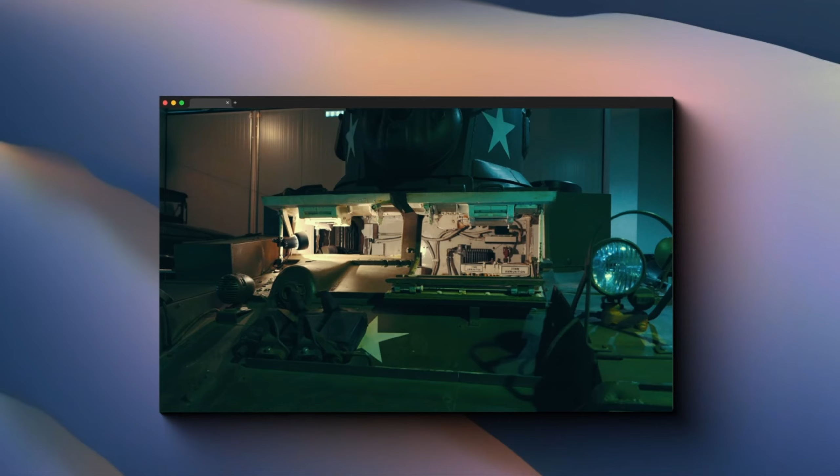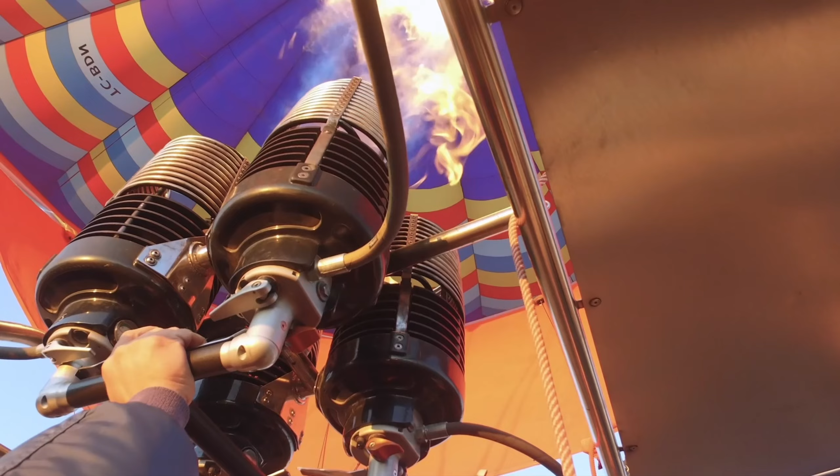Let's start by clearing up a massive misconception. When I say gas engine, I'm talking about the reciprocating piston engines you find in cars, not the fuel itself. Because here's where it gets interesting, modern jet engines actually do burn a type of gasoline. It's called jet fuel or kerosene, which is basically gasoline's more refined cousin. But the way these engines burn that fuel? That's where the magic happens. It's the difference between pushing yourself on a skateboard versus strapping a rocket to your back. Both might get you moving, but one is clearly better suited for certain situations.

Think about this for a second. A typical car engine has hundreds of moving parts: pistons pumping up and down, valves opening and closing, a crankshaft spinning around. It's like a mechanical orchestra where every instrument needs perfect timing. Now imagine trying to conduct that orchestra while flying through a thunderstorm at 500 miles per hour. Starting to see the problem?

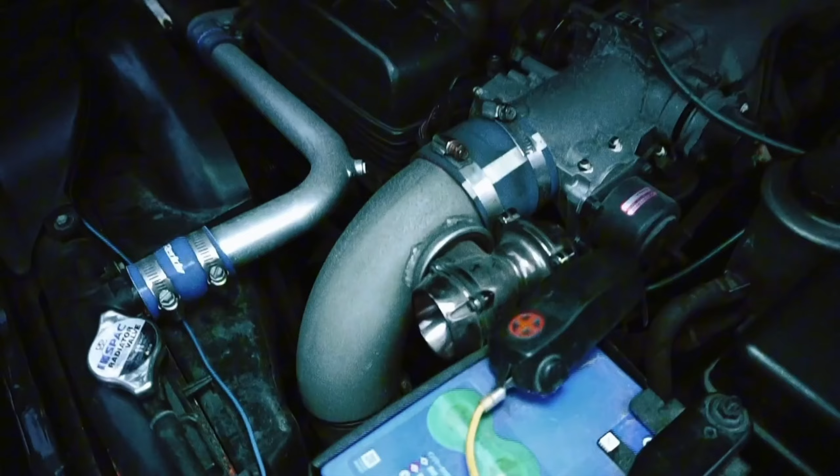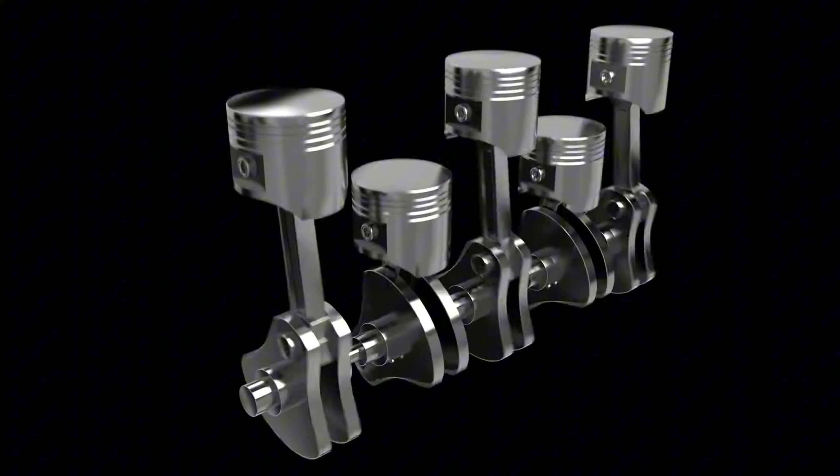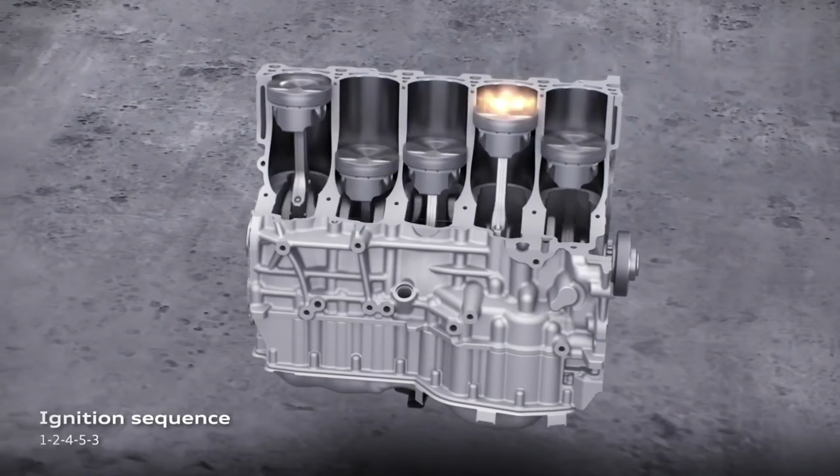Here's where we need to talk about something called the altitude problem. Lighting a match at sea level is much easier than lighting a match at the top of Mount Everest. Why? Because the air up there is about a third as dense as it is down here. Your car engine faces the exact same problem. Piston engines are like that friend who can only function with their morning coffee, except their coffee is oxygen. They need a very specific mixture of fuel and air to work properly. At sea level, no problem. But climb to 30,000 feet, and that engine is basically suffocating.

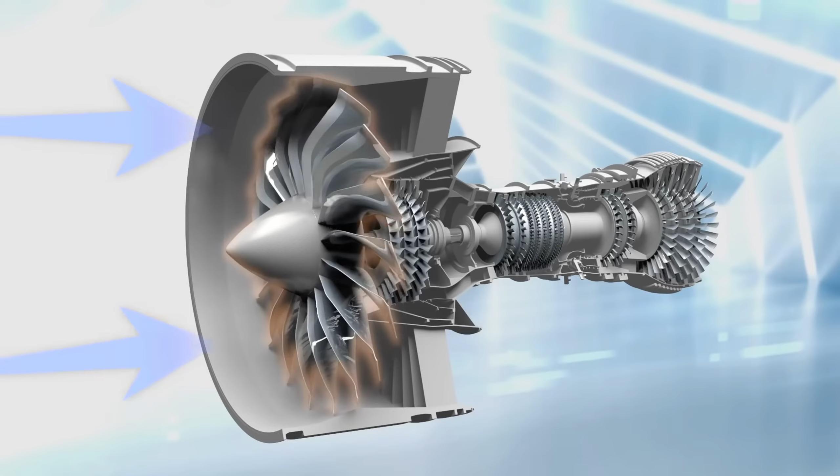Commercial airliners cruise at altitudes where the air pressure is so low that water boils at room temperature. Your car engine would wheeze, sputter, and die long before reaching those heights. Meanwhile, jet engines actually love thin air. They're designed to compress massive amounts of air internally. We're talking about compression ratios that would make your car engine explode. A modern jet engine compresses air by a factor of 40 to 1. It's creating its own atmospheric pressure, basically bringing sea-level conditions with it wherever it goes.

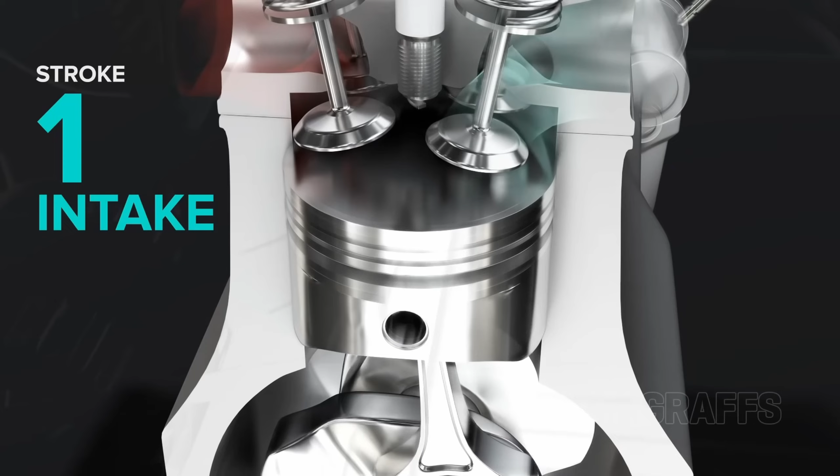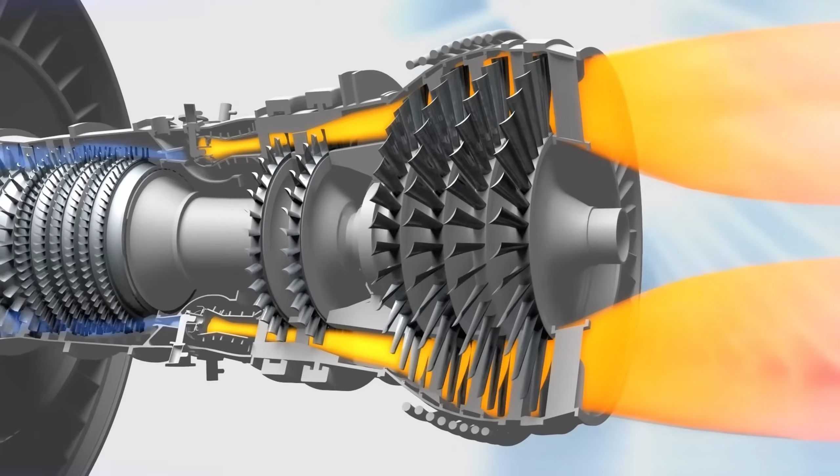Here are some numbers that will blow your mind. A typical car engine produces about 0.5 horsepower per pound of engine weight. Not bad for getting you to work and back. But a modern jet engine? We're talking about 6 to 8 horsepower per pound. Imagine if your 300 horsepower car engine suddenly had 3,600 horsepower but weighed the same. That's the kind of power density we're talking about. It's like comparing a household fan to a hurricane.

Here's a real-world example. The General Electric GE90 engine, which powers Boeing 777s, produces 115,000 pounds of thrust. Converting that to horsepower at cruising speed, we're looking at roughly 100,000 horsepower from one engine. That's more power than 100 Formula One race cars combined. Now imagine trying to get that same power from piston engines. You'd need an engine the size of a building, and your plane would look less like an aircraft and more like a flying warehouse. Not exactly aerodynamic.

But here's the kicker. It's not just about raw power, it's about sustained power. Your car engine might produce peak power for a few seconds during acceleration, but a jet engine maintains enormous power output for hours on end. It's the difference between a sprinter and an ultramarathon runner who can sprint the entire race.

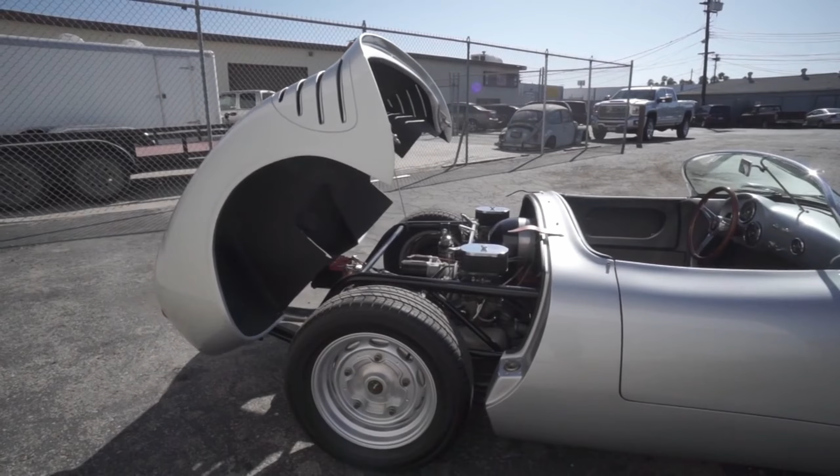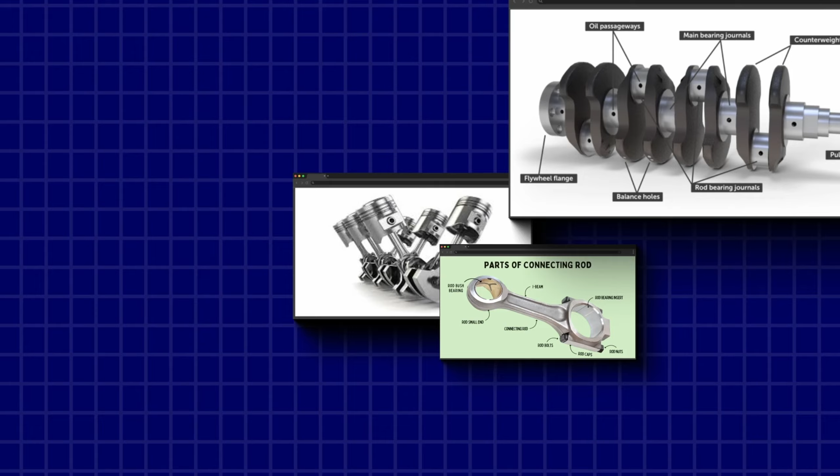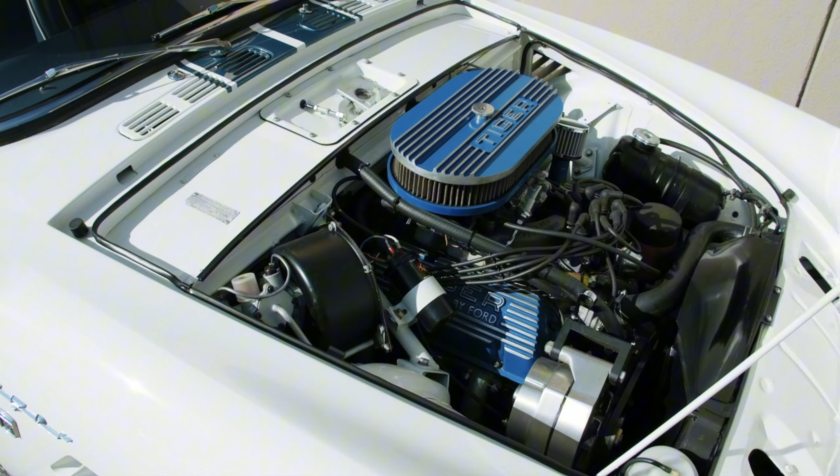This might sound counterintuitive, but jet engines are actually simpler than car engines. I know, how can something that costs millions of dollars be simpler than what's under your Honda's hood? Let's break it down. A car engine has pistons, connecting rods, a crankshaft, camshafts, valves, valve springs, timing chains, and dozens of other reciprocating parts. Each part moves back and forth or up and down thousands of times per minute.

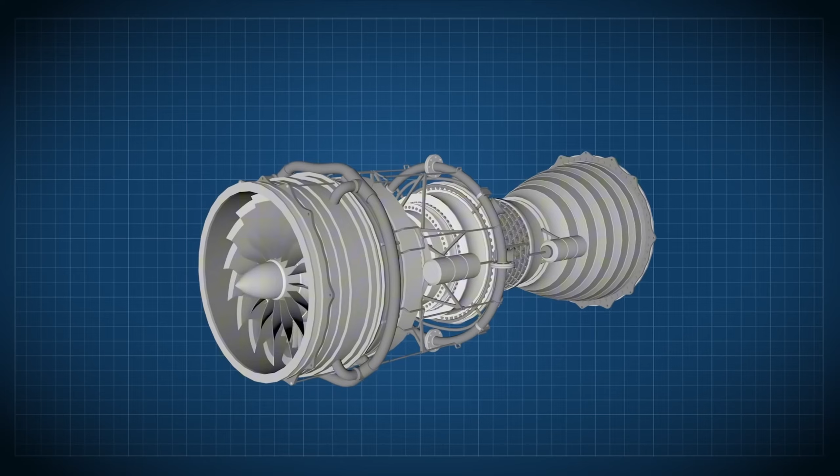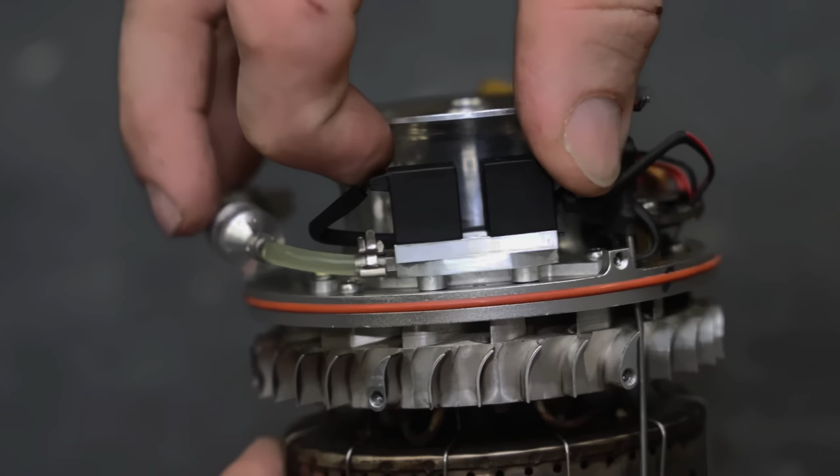Every direction change is a stress point, a wear point, a potential failure point. A jet engine? It basically has one moving part, a shaft with compressor blades on one end and turbine blades on the other. Everything spins in one direction, continuously, smoothly. No reciprocating motion, no complex valve timing, no distributor caps or spark plug wires to worry about. It's elegant in its simplicity. Leonardo da Vinci would have loved it.

Maximum efficiency through minimum complexity. Think about it this way: what's more likely to break, a ceiling fan that spins continuously, or a sewing machine with all its intricate back-and-forth motions? The jet engine is the ceiling fan of the aviation world.

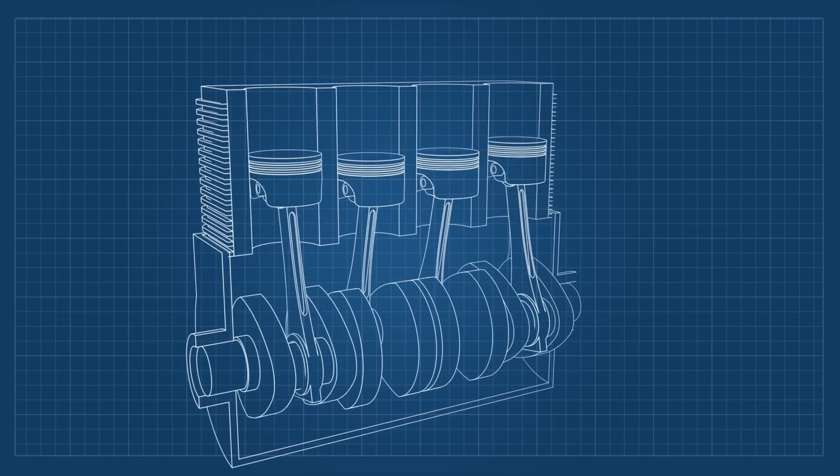If ceiling fans could generate hurricane-force winds and run for 20,000 hours between overhauls. Here's something you've probably never thought about while flying: vibration can literally shake an airplane apart. I'm not trying to scare you, modern planes are incredibly safe, but vibration is an engineer's nightmare at 35,000 feet.

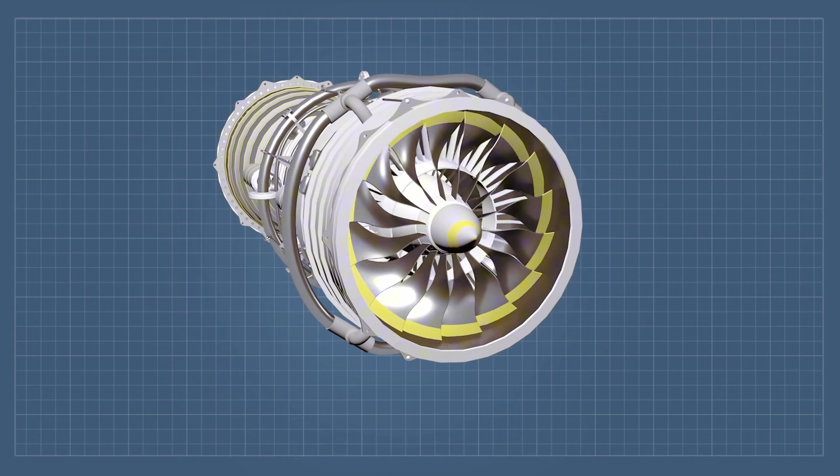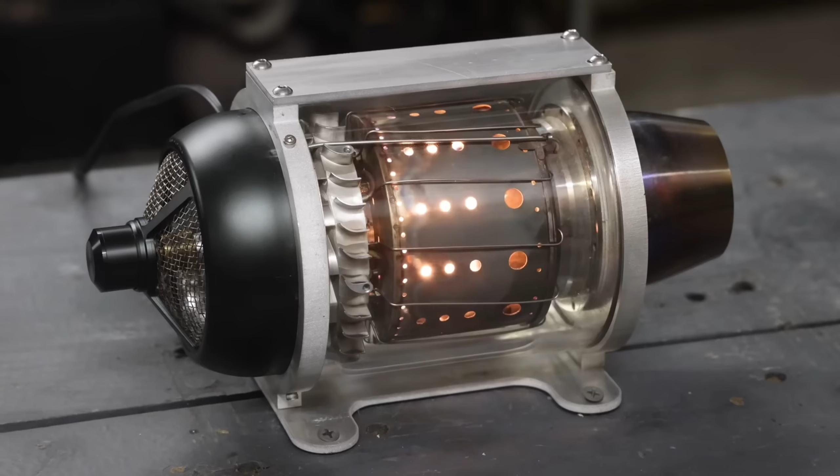Piston engines are vibration machines. Every time a piston fires, it's like a tiny hammer blow. In a six-cylinder engine running at 2,500 RPM, that's 7,500 little explosions per minute. Each one sends a shockwave through the engine mount, through the wing, through the fuselage. Over time, this can cause metal fatigue, loose rivets, and cracked components.

Now multiply that by the 4, 6, or even 8 engines you'd need to power a large aircraft with piston power. It would be like strapping a paint shaker to each wing and hoping for the best.

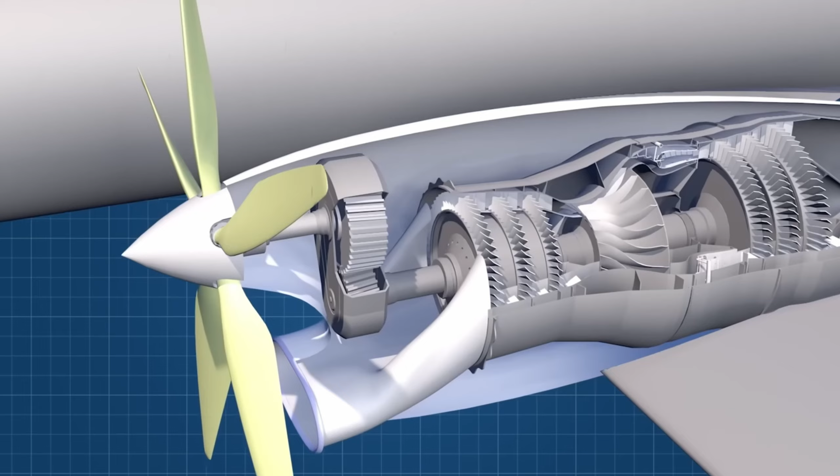Jet engines, on the other hand, run smooth as silk. The combustion is continuous, not pulsed. The rotation is balanced and constant. Passengers can place a coin on edge on their tray table and it'll stay standing during cruise flight. Try that in a propeller-driven aircraft with piston engines—that coin would dance off the table faster than you can say turbulence.

This isn't just about comfort. Reduced vibration means less maintenance, longer component life, and most importantly, better safety margins. When you're 7 miles up in the sky, you'll want everything running as smoothly as possible.

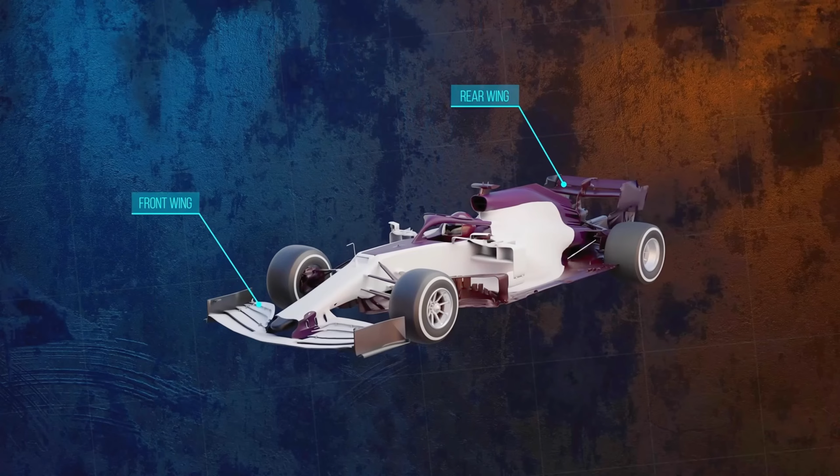Let's talk about speed, because this is where piston engines hit a brick wall—literally, an aerodynamic brick wall. Propeller-driven aircraft with piston engines face a fundamental problem: propeller tips can't exceed the speed of sound without losing efficiency dramatically. As a propeller blade approaches sonic speed, it creates shock waves that destroy lift and create enormous drag. It's like trying to swim through molasses instead of water.

This limits piston engine aircraft to about 400 to 450 miles per hour max, and that's pushing it. Most cruise much slower, around 200 to 300 miles per hour.

Meanwhile, jet engines laugh in the face of the sound barrier. They're designed to handle supersonic airflow. The Concorde cruised at Mach 2, twice the speed of sound. Modern commercial jets cruise at about 550 miles per hour, just under the sound barrier, not because they can't go faster, but because going faster isn't economically efficient for passenger travel.

Here's a mind-bending comparison: a flight from New York to Los Angeles in a modern jet takes about 5.5 hours. In a fast piston engine aircraft, you're looking at 12 to 15 hours minimum with multiple fuel stops. That cross-country business trip just became a 2-day adventure.

This might shock you, but jet engines are actually more fuel efficient than piston engines for their intended purpose. Wait, what? How can something that burns thousands of pounds of fuel per hour be efficient? It's all about the right tool for the job.

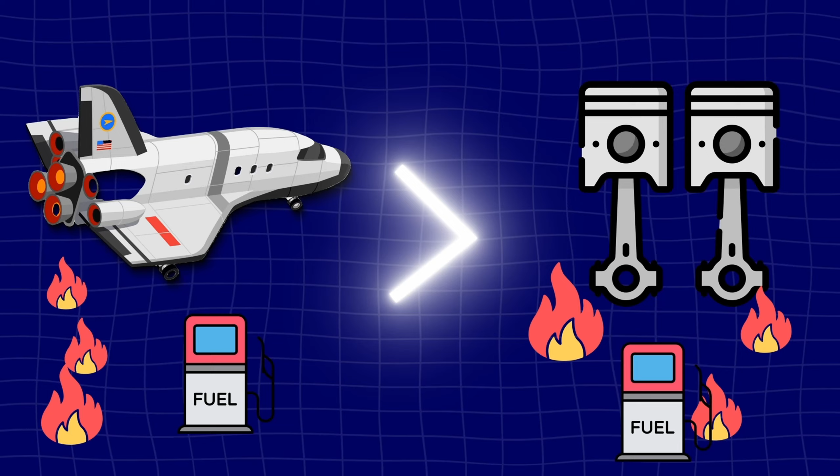Sure, a jet engine burns more fuel per hour than a piston engine, but it's also moving 300 people at 550 miles per hour. Do the math on fuel per passenger mile, and suddenly jets look pretty good.

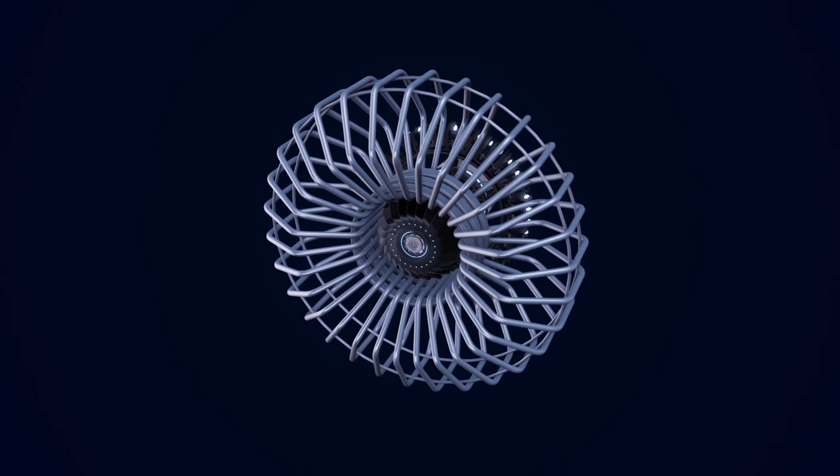Modern high-bypass turbofan engines are marvels of efficiency. They move huge amounts of air at relatively slow speeds, which is far more efficient than moving small amounts of air at high speeds. It's the difference between fanning yourself with a newspaper versus blowing through a straw. Which one moves more air with less effort?

At cruising altitude, where the air is thin and drag is reduced, jets can achieve fuel efficiency that would make piston engines jealous. We're talking about 100-plus passenger miles per gallon in some modern aircraft.

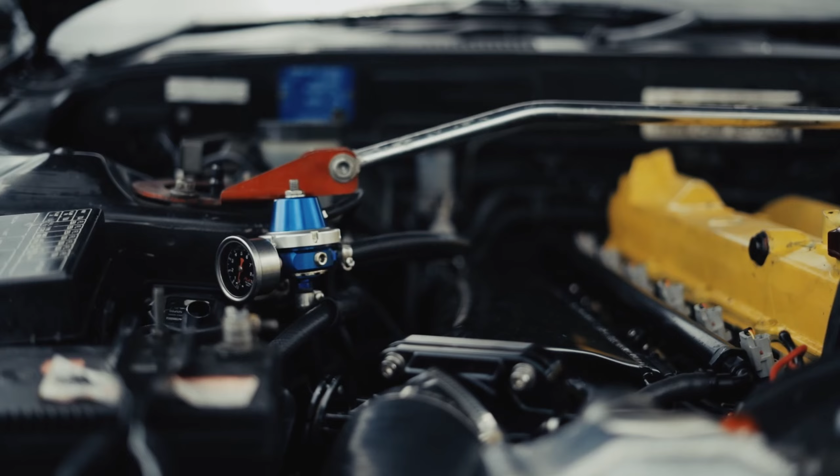Your car probably doesn't even get 100 passenger miles per gallon with just you in it. Plus, jet fuel has more energy per pound than gasoline, and jets can carry enormous amounts of it without the complex fuel management systems piston engines would need. No carburetors to adjust for altitude, no fuel pumps struggling against vapor lock, no concern about fuel mixture ratios. The engine takes what it needs and burns it completely.

When you're flying over the Pacific Ocean, thousands of miles from the nearest airport, engine reliability isn't just important, it's everything. This is where jet engines absolutely demolish piston engines. Modern jet engines are so reliable that twin-engine planes are certified to fly up to 5.5 hours away from the nearest airport on a single engine. That's called ETOPS, Extended Twin Engine Operations Performance Standards. And pilots joke it stands for engines turn or passengers swim.

The mean time between failures for a modern jet engine is measured in tens of thousands of hours. Some engines go their entire service life, 20,000 plus flight hours, without a single in-flight shutdown. That's like driving your car 1.2 million miles without the engine ever failing. Piston aircraft engines? They require overhauls every 1,500 to 2,000 hours. That's like rebuilding your car engine every 90,000 miles. And in-flight failures, while still rare, are orders of magnitude more common than with jets.

The key is that jets have fewer failure points. No magnetos to fail, no carburetors to ice up, no valve trains to break. Just smooth, continuous rotation with built-in redundancy. Each engine is actually multiple engines in one. If a turbine blade fails, the engine keeps running. Try running your car with a broken piston and see how far you get.